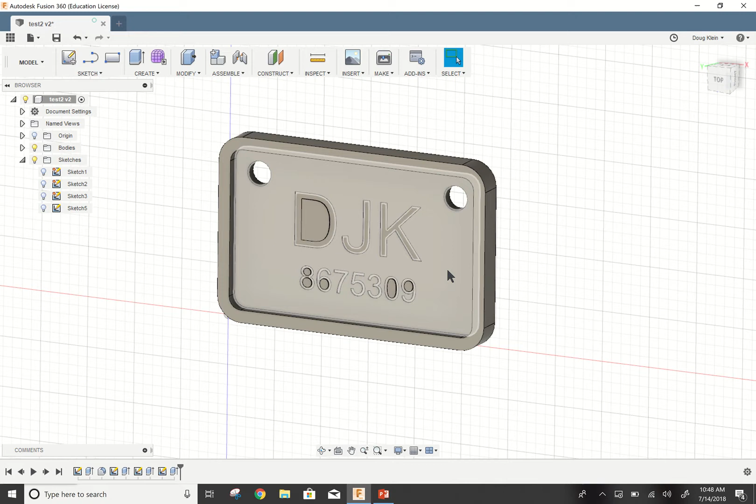We're going to be completing the first step of the license plate project for the CNC machine. To work today, we're going to be utilizing Fusion 360 and developing just the 3D modeling component of it. There'll be another step showing the CAM project later on.

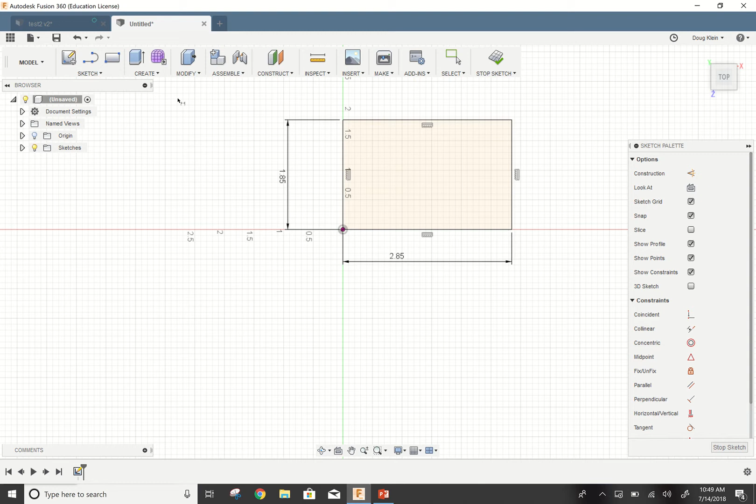Go in, select New Design. I'm going to sketch a rectangle on my XY plane. Fusion 360 is built in with a lot of hotkeys, so down here where I want a dimension, I could have very easily just pushed D. Similarly, when I want to extrude, I could very easily just push E right here, which I'll do. Select my face, 0.25 is my height.

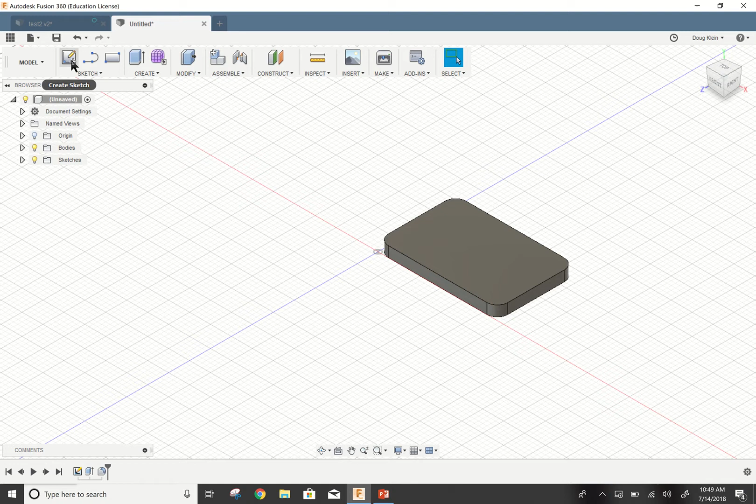I'm then going to go in and modify with the fillet. Could have very easily just pushed F. I'm going to select each of my 4 edges, setting them to 0.5, and now I'm going to select a new sketch right here. And I'm going to develop an offset and pull that handle down a little bit, and we're going to set it to be 0.125, and we're going to extrude that in a negative 1/8 inch.

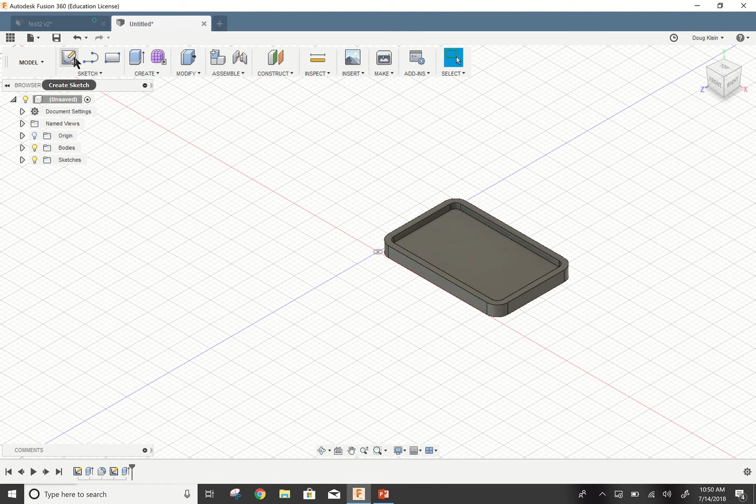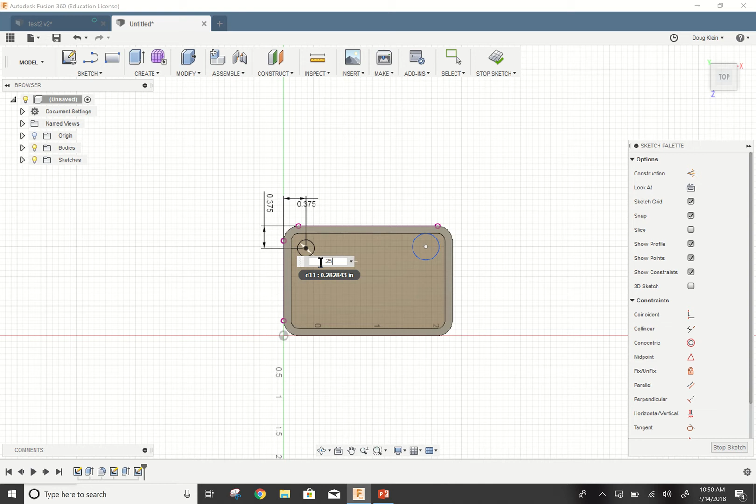There we go. Let's develop another sketch. And in this one, we're going to add 2 holes, which we will use for hanging this plate on the CNC machine. I'm going to dimension those to 3/8 in each direction. I'm going to provide them a diameter of 0.25. I'll do that over here too, 0.25. Divide by 8. And 3 divided by 8.

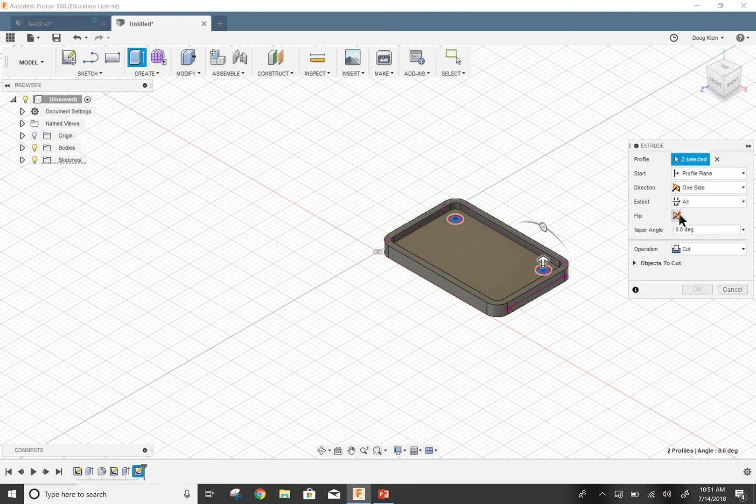We're going to extrude those. I'm going to select the face. I just pushed E for extrude. We're going to change our distance to all, and we're going to change it to cut. Notice it did not change the direction, so we're going to have to select this flip command there, and then it's going to go through for us.

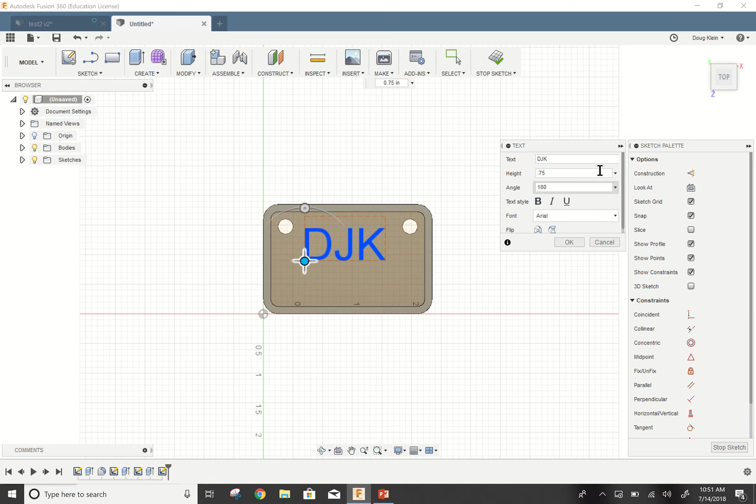I'm going to add my initials on the front now, so I selected sketch, and now I'm going over to text. I'm going to add my initials, DJK. I'm going to take my height to 0.75. I'm just pressing tab to navigate through that window. And then I'm going to have to set my angle to 180. I'm going to center that a little bit.

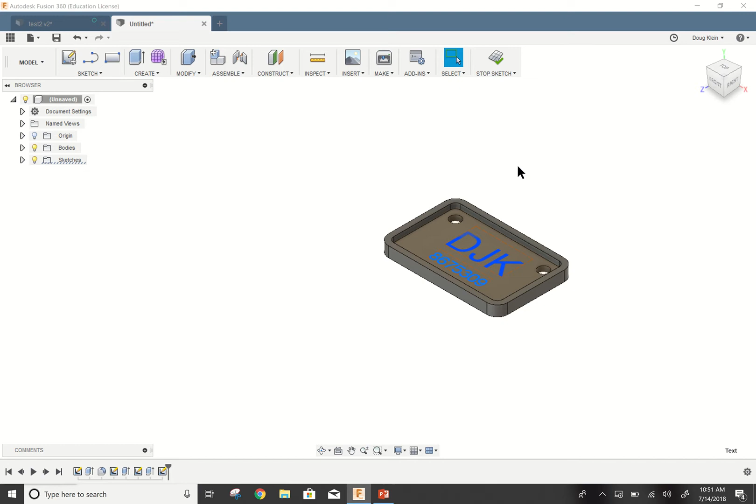I'm going to select Extrude, so I just press the letter E. I'm selecting both those sketches. I'm going to push in negative 0.01 for my distance. So I didn't get both. There we go. So now we have both those there.

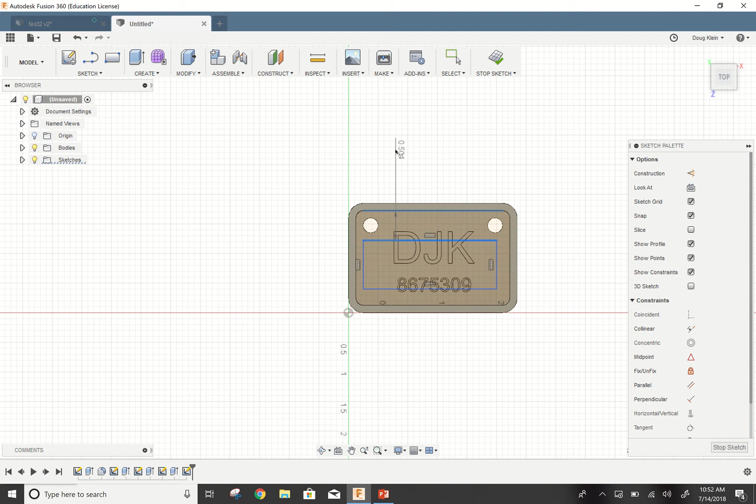I'm going to add an additional sketch now, right here. And what this will be used for is we're going to set this up. I'm going to make sure not to be in any of the circles because I want it to be unconstrained. We're going to set it up to be 3/16 of an inch away from the side. The reason is we're going to use a 3/8 end mill to add a fillet to the inside of our license plate right there.

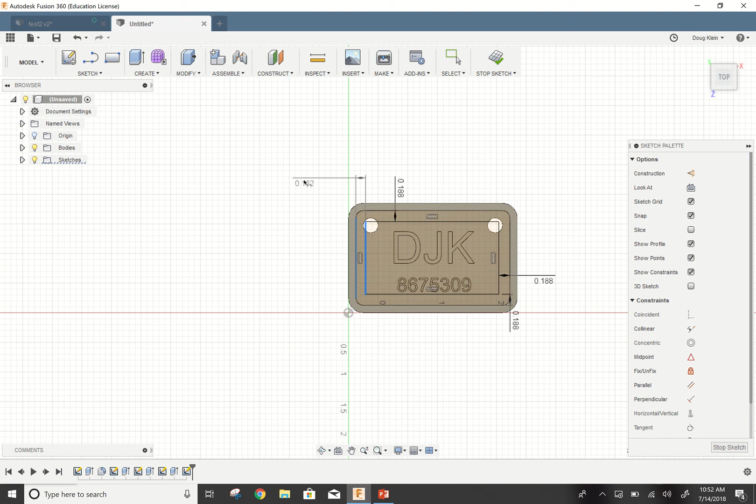And it's going to be easier to have that line there as a reference than the actual fillet, because we'll be able to drive it from the sketch easier than driving it from the feature. Alright, let me select Stop Sketch. We'll take a look at that real quick. Alright, I think I am in good shape to move forward. And so I hope that was successful for you, and we'll move on.